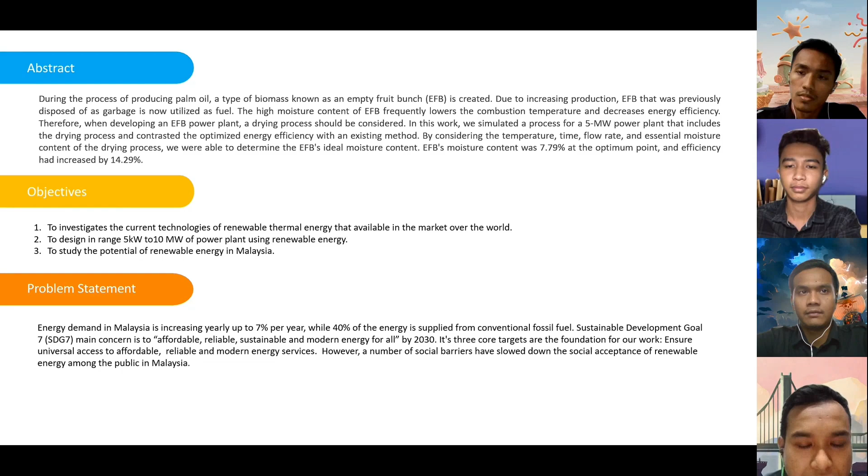However, a number of social barriers have slowed down the social acceptance of renewable energy among the public in Malaysia, where it originated in West and Central Africa as well as in Malaysia, Indonesia and Thailand, where it predominates, thrives regionally, and has long since established itself.

Oil palm is widely grown as a source of oil. The rapid growth of oil palm plantations in various areas as a nation has produced massive amounts of vegetable waste, complicating replanting efforts and raising serious environmental concerns.

Thus, agricultural waste produced by the oil palm industry during replanting, pruning and milling operations is referred to as oil palm biomass and is typically left to degrade in the field. In essence, fibers from empty fruit bunches are either left over after the extraction of palm oil from palm fruits, cultivated materials, or the carcasses of trees that have reached the end of their useful life.

The waste is typically dumped carelessly or utilized as fuel by residents for cooking, neither of which is environmentally friendly. The fruit bunches are removed from the oil extraction process and left unfilled as leftover. Although the presence of these empty fruit bunches (EFB) at the mill's gate cannot be avoided, waste management and disposal solutions must take into account the enormous difficulty that this biomass waste gives mill management.

Theory of Rankine cycle. An example of biomass produced during the process of producing palm oil is the empty fruit bunch (EFB). EFB, which frequently contains a lot of moisture and was disposed of as garbage, has lately become more prevalent and is being utilized as fuel.

By using EFB of palm oil, the organic Rankine cycle (ORC) was established as a combined heat and power system in the sector of palm oil mills by employing EFB of palm oil. The basic ORC system's configuration is used as a starting point, along with an ORC system with a regenerator.

The system used an expander to use the energy in the organic working fluid for power generation, and a direct-fired biomass thermal oil heater (TOH) unit to transfer heat from fuel to the organic working fluid.

The ideal Rankine cycle and the ORC operate on the same principle. Instead of water, an organic substance with a low boiling point is used in ORC operation. Hence, lowering the temperature is necessary for evaporation.

The basic ORC operation consists of pumping up the working fluid pressure, adding high temperature heat through a boiler, expanding high temperature and high pressure fluid through a turbine, and rejecting low temperature heat through a condenser. Below is an example of the Rankine cycle, superheated Rankine cycle, and reheat Rankine cycle.

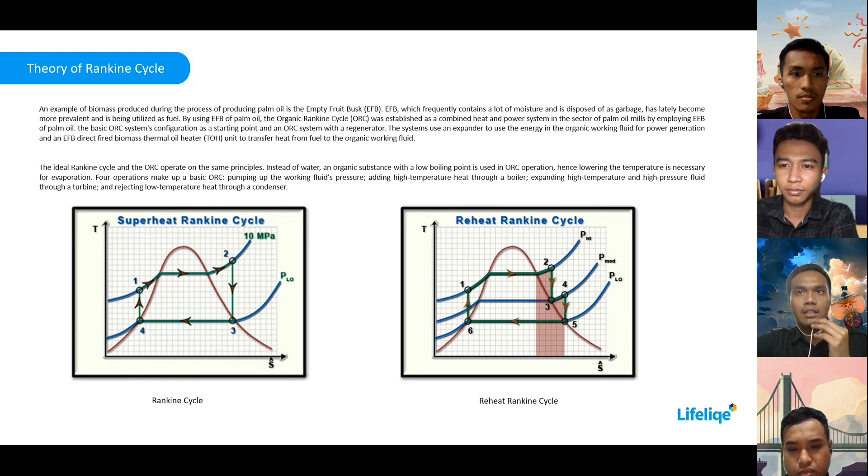The working concept is there are 4 points in this Rankine cycle. Point 1 is where the organic fluid is inserted into the pump, where the condition is fully liquid. At point 2, the pump compresses the fluid in order to transfer it to the boiler, so the state of the organic fluid at that point is compressible fluid.

There is no compressible data inside the thermodynamic table. However, there is work done by the pump. Thus, using the work formula, we calculate the pressure at point 2. W equals specific volume, P1 minus P2. And work also equals enthalpy 2 minus enthalpy 1.

At point 3, the boiler heats the organic fluid until it becomes overheated, putting it in a state of superheated, fully vapor fluid that goes to the turbine. At point 4, when the vapor is inside the turbine, the shaft of the turbine, which connects to the generator, will rotate because the vapor moves the turbine fan.

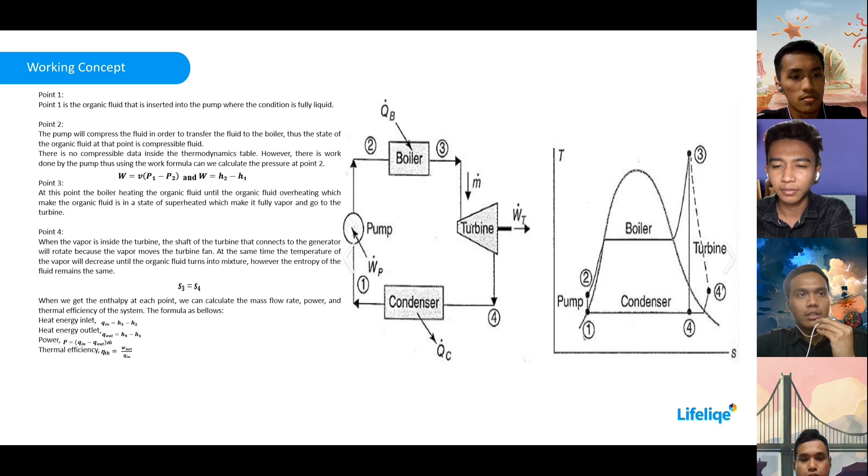At the same time, the temperature of the vapor will decrease until the organic fluid turns into a mixture. However, the entropy of the fluid remains the same, S3 equals S4. When we get the enthalpy at each point, we can calculate the mass flow rate, power, and thermal efficiency of the system. The formulas are as below: heat energy inlet, heat energy outlet, power, and thermal efficiency.

Next is the technology of biomass. Malaysia has spent the last 40 years as one of the top producers and exporters of palm oil in the world. Along with crude palm oil (CPO) and palm kernel oil, the palm oil business also generates palm shell, pressed fiber, empty fruit bunches (EFB), palm oil mill effluent (POME), palm trunk used for replanting, and palm fronds during pruning.

In the processing of fresh fruit bunches, over 70% of the volume is discarded as waste. About 4 million hectares of land in Malaysia are used for oil palm plantations. Just four states, Sabah, Johor, Pahang, and Sarawak, have more than 500,000 hectares of land under cultivation, accounting for over 75% of the entire area planted.

Fresh fruit bunch (FFB) processing volume was anticipated to be 75 million tons, while the EFB production volume was estimated to be 16.6 million tons. Malaysia produces over 58 million tons of POME annually, which has the capacity to generate about 15 billion cubic meters of biogas annually.

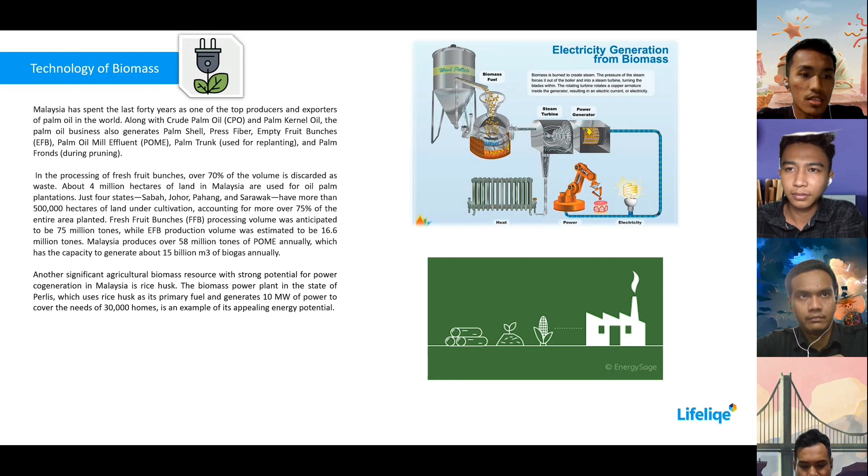Another significant agricultural biomass resource with strong potential for power cogeneration in Malaysia is rice husk. The biomass power plant in the state of Perlis, which uses rice husk as its primary fuel and generates 10 megawatts of power to cover the needs of 30,000 homes, is an example of its appealing energy potential.

This is the design of the system. The design of the EFB palm oil power plant is based on the Rankine cycle. The assumption made in the design is that the system is a closed system. The pump and turbine are an isentropic process, while the boiler and condenser are an isobaric process. This assumption is made so that the cycle of the system is an ideal Rankine cycle.

It is designed that a reheat process is used to increase the efficiency of the entire process, since reheating ensures that the fluid going to the low pressure turbine is fully vapor. The first stage is the pump compressing the fluid to the boiler. The second stage is where the fluid is heated, so the vapor continues to flow to the turbine.

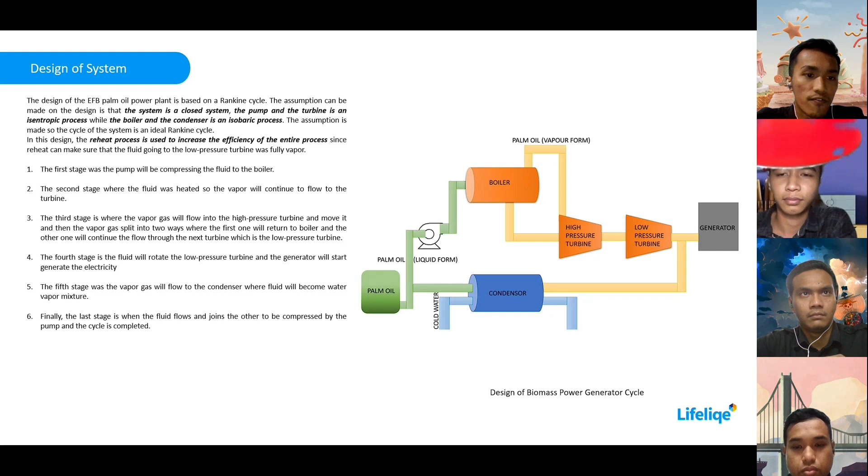The third stage is where the vapor gas flows into the high pressure turbine and moves it, then the vapor gas splits into two paths: one returns to the boiler, and the other continues to flow through the next turbine, the low pressure turbine. The fourth stage is the fluid rotating the low pressure turbine, and the generator starts generating electricity.

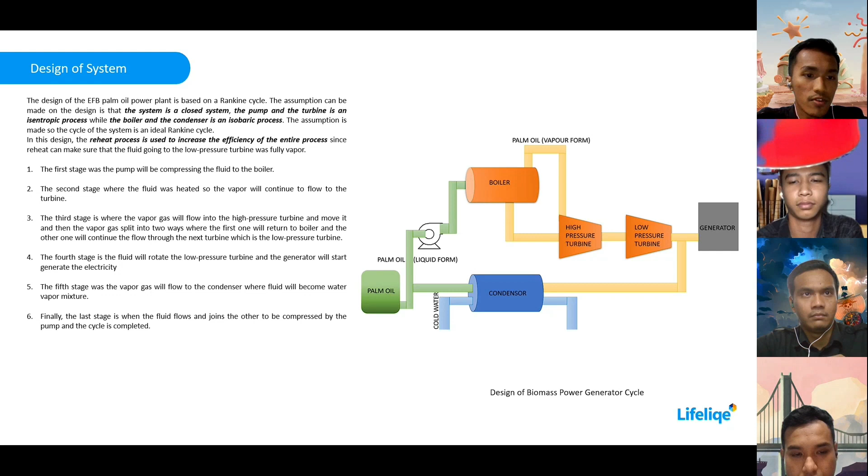The fifth stage is the vapor gas flowing to the condenser, where the fluid becomes a water vapor mixture. Finally, the last stage is when the fluid flows and joins the rest to be compressed by the pump, and the cycle is completed.

Okay, this is our design of a 5 megawatt power plant. The question is to consider a steam power plant that operates on a Rankine cycle and has a net power output of 5 megawatts.

Steam enters the high pressure turbine at 10 megapascals and 500 degrees Celsius, and the low pressure turbine at 1 megapascal and 500 degrees Celsius. Steam leaves the condenser as a saturated liquid at a pressure of 10 kilopascals.

The isentropic efficiency of the turbine is 80% and that of the pump is 95%. The assumption is water is the working fluid, with no potential or mechanical energy considered. The steam is superheated at high temperature. Assume adiabatic conditions at the boiler and condenser, and neglect heat loss at the pump and turbine.

For this calculation, we find the possible value at every stage from the diagram using the values that have been initialized. First, at point 1, the pressure is 10 kilopascals. Then for state 2, we use the pump work formula: V1 times (P2 minus P1), and H2S equals H1 plus pump work to find the value of enthalpy.

For state 3, we can find the value in the table, and for state 4, we find the value related to state 3, where S4 equals S3, equal to 6.5995 kilojoules per kilogram times Kelvin. Using this value, we can find the relation between these two states and determine all the values for state 4.

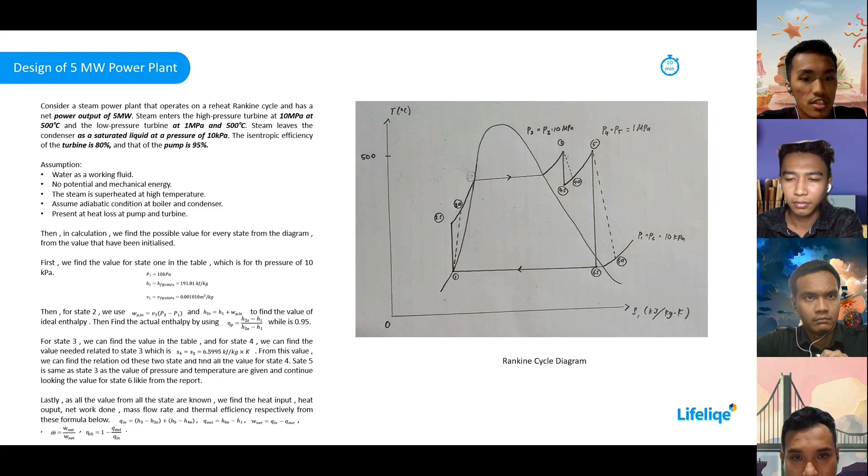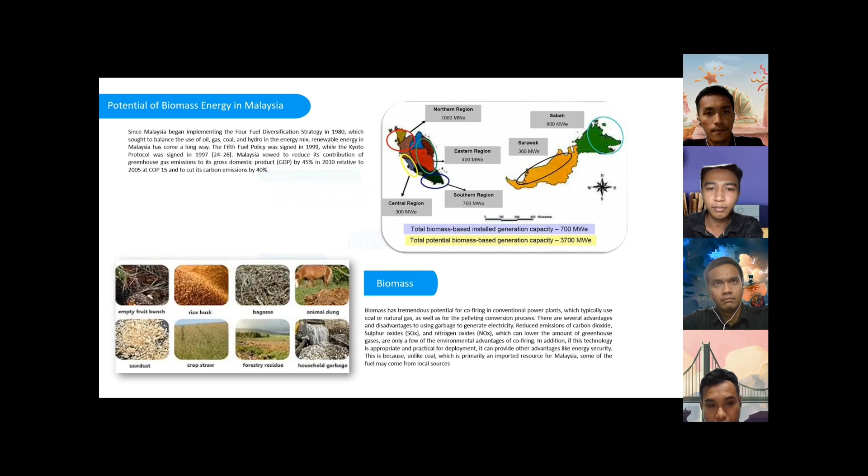Discussion: biomass power plants can generate between 2 to 1,000 megawatts of electricity, though most range from 20 megawatts to 200 megawatts. To put this into perspective, 20 megawatts is enough to power around 15,000 to 20,000 homes for an hour.

So our palm oil power plantation can produce 5 megawatts. In Malaysia, an average home will use around 22,440 watts per day, so our power plant can power around 250 homes for daily use.

So one of the benefits of this biomass power plant is that it is renewable energy. This is because there are plenty of sources of biomass that can be used to create this energy. We can also create that source, as we can do replantation for palm trees.

As for the disadvantage, it needs a larger space to add the source. So if we have to do replantation, we need another space. As mentioned, Malaysia is one of the smaller countries in the world, so our land is limited.

Below is a statistic of household power use in Malaysia from 2002 to 2016.

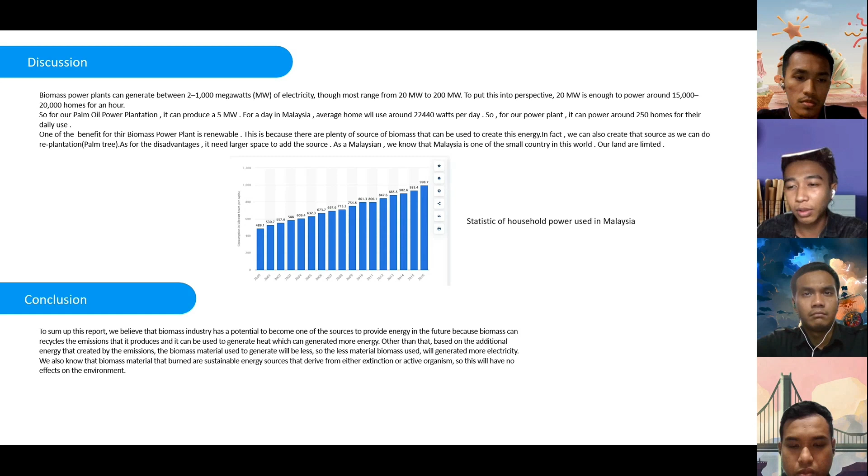So for the conclusion, to sum up this report, we believe that the biomass industry has potential to become one of the sources to provide energy in the future, because biomass can recycle the emissions it produces, and it can be used to generate heat, which can generate more energy.

Based on the additional energy that is generated, the less material biomass used will generate more electricity. We also know that biomass materials that burn are a sustainable energy source derived from non-extinct or active organisms, so this will have no effect on the environment.